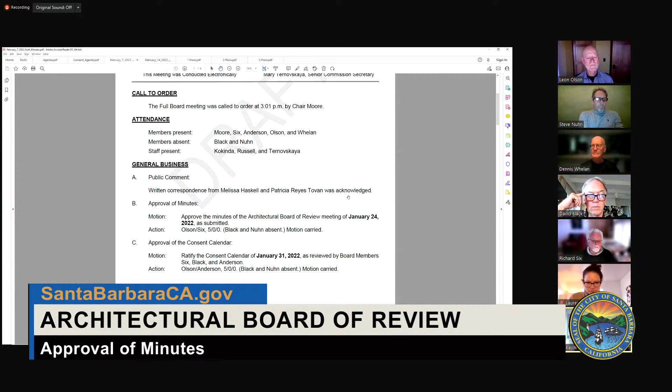We have those up. Apologize, we've got some construction next door, so you might hear some background noise. Move we accept as presented. I'll second that. Okay, any discussion?

No? Okay, let's take a vote. Chair Moore, Yes. Vice Chair Six, Yes. Board Member Anderson, Yes. Board Member Black: I'm going to abstain since I wasn't at the meeting. Board Member Nuhn: I'll also abstain since I wasn't at the meeting. Board Member Olson, Yes. Board Member Whelan, Yes. All right, motion carries. Thank you.

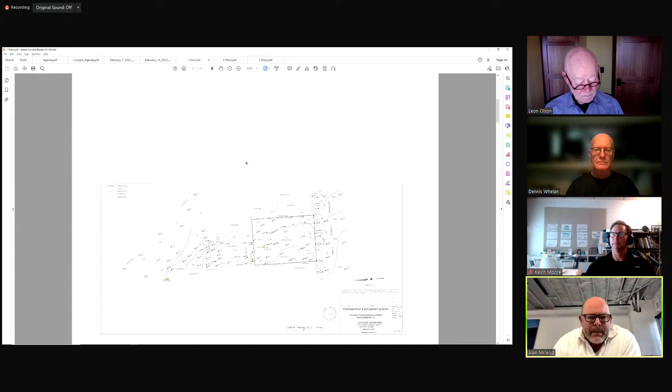If we go to the next sheet please, this is just a current survey of the property. Right now it's an existing open lot. There's a couple of fruit trees on the lot and an existing curb cut.

So our approach to a portion of the neighborhood context is to really look at the material palette that was used within this block and to the east. Can we go to sheet 1.02 next please?

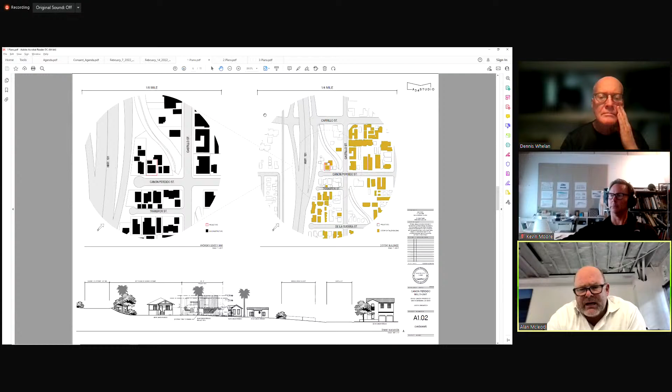We did an analysis on the existing single-story homes in the neighborhood and the existing two-story and apartment buildings in relationship to the context, to look at how these larger structures sit next to the smaller, older structures. If we concentrate on the large map to the right-hand side, we can start to see the two-story analysis where we've got two-story homes located up against a lot of the single stories, especially prominent in the block to the east of where we're located.

If we can go back to sheet 1.00 — a full site analysis of opportunities and constraints diagram from the site. It's a relatively small site with all our setbacks located on it. There's an opportunity for a mountain view from the second story of anything that was proposed. We're taking care of light as it relates to morning sun and afternoon sun penetration into the building, as it relates to our neighbors.

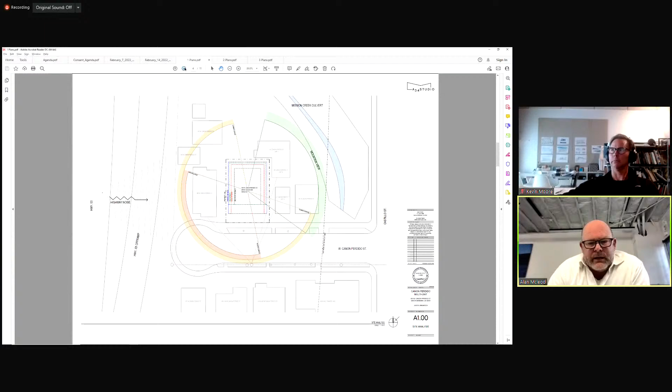A big factor in the direction that was driven was the highway noise factor that we have to contend with also. If we go to the next sheet — as we all know, form follows parking, so we did a large number of studies to look at how we could get the two parking spaces to work the most efficiently on the site.

We've ended up with a single curb cut, two-car garage as a carport that is on the easterly side of the property. Then the two units at the ground floor — the strategy was to use the lower level as a buffer that we come up and over. So from a site strategy, we have our open space requirement to the rear of the property, limiting the parking.

And transversing through the site for the car, so that's as close to the property line as we could be with the garage. Then to accommodate the balance of the open space as a roof deck above. There's a plan, obviously it's not going to be reviewed today, but for an ADU to the rear of the site to make it the 3 units.

For entry, we studied a lot of different options with entry into the building, and it was determined most efficient from a sound and livability standpoint to keep the quiet side of the house to the west and let the eastern portion open up to the view and to the street. So if we go to the next, and the next one.

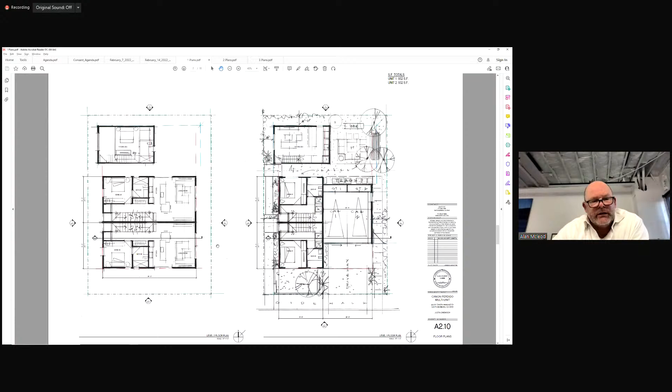On the next sheet, through a skylighted roof access where we handle the photovoltaic array, and then up to a roof deck as a slightly taller element. The idea was to keep the bedroom wings to a minimum plate height and create a little volume on the living side of the house that opens up, helping with the massing of the building to break it up as we address the street elevations and wrap around.

So if we go to the elevations: the palette, taking from the neighborhood, we wanted to do a wood siding, probably a naturalized wood siding, and a plaster wall from the street, which can be seen in the bottom lower elevation.

At this stage, the idea was to carry that wood element as a screen that continues up as a handrail for the roof deck portion, going from solid below to a staggered, open railing system above.

The little section on the left-hand side shows the minimum volumes we're working with: an 8-foot plate for the lower room, 8-foot plate to the upper bedroom, and then a 10-foot plate just to give that living area a little more volume, because these units are fairly small.

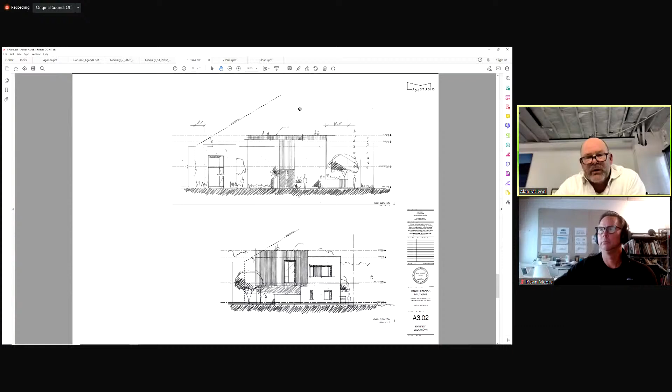I think that's pretty much it. We have the other elevations on the next sheet: the entry elevation and the rear elevation. In the rear elevation, we can see the screening for bikes and trash in that lower level, which is all overhung, and that whole area opens to the outdoor living space. The upper level is just the entry elevation—very quiet, no windows proposed on that elevation.

And I think that concludes our presentation. Happy to answer any questions.

Materials: we discussed just a wood siding at the upper level, off-white plaster for the plaster portion of the volume, and we were looking at doing an exposed block garage base.

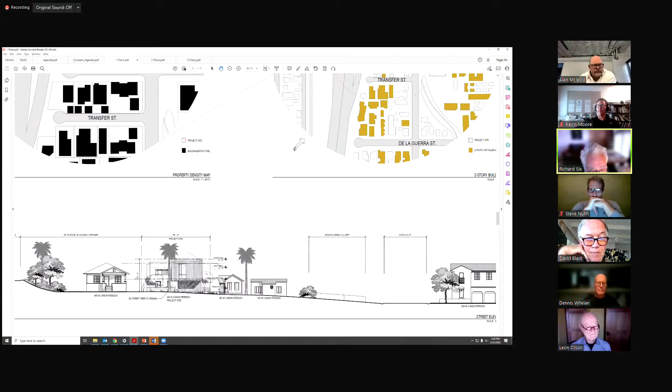Next sheet—well, you can see it here. There seems to be a conflict between the solar ordinance line for the property and... yeah, right there. There seems to be a conflict with solar ordinance limits and the property to the east.

Can you explain that? So the idea—obviously we have two choices. We could go with a cable rail and meet the solar ordinance, or we could do something a little more architectural and integrate it into the screen. So at this stage, we're looking for some direction from you.

I would prefer, obviously, to have the wood siding run up and become transparent to meet the 4-inch requirement. The other option is to create the parapet at the ordinance height and go with a cable rail above, which would be less preferable, I believe.

All right, then just one more minor point—if we go to the site plan, the floor plans, right here, yes. And here, the trash is aligned with the rear of the garage and very present to the open living area, but yet on your elevations of the rear, there is a wall. Can we go to the rear elevation of that?

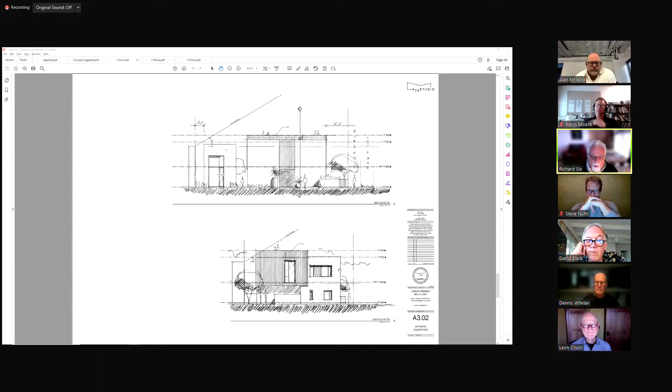Bingo. That lower one seems to be a solid wall. I don't see how the trash is accessed if there's a single depth of trash bins. The idea would be that it would be a screen wall that you can reach over, and the trash could be pulled out from one end on trash day. So that would be stacked.

Okay, those are my questions. Anybody else? Mr. Whelan? Thank you, Chair Moore. First for staff, are we reviewing the ADU, the third building on the site plan? To Board Member Whelan, no. As it's proposed as future, there's no plans set for us to review. So that answer would be no.

All right then. And for the applicant, are there any existing trees to be retained? I believe there's one large avocado and one other fruit tree, and I believe both will be replaced with a couple of new trees to help buffer with the neighbor. So I'm confused - you're removing and replacing them, or they're to be retained? No, they'll be taken down.

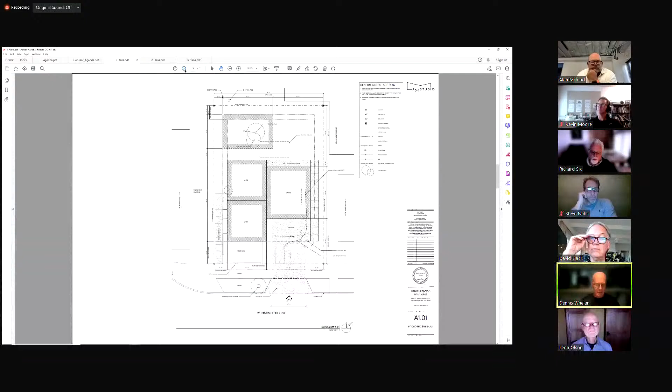Be that as it may. Yeah, a couple of clarifications. If you can go to the plan, Mr. Russell - it doesn't appear there's any interior connection from the garage to the units. Is that correct? That is correct. So all traffic comes from the driveway out onto the public walkway and around to the entries, right? People will walk that direction, yes.

This isn't specifically germane to our charge, but what are the long hallways on the first floor adjacent to the bedrooms? What is the purpose there? They lead down to the bathroom and to the mechanical space and the laundry. Just looks a little inefficient to me, but be that as it may.

For the life of me, I could not figure out how you got from the second floor to the roof deck through that opening, the device that you showed. Where is that? Where does that occur on the second floor plan? It'll occur over the stair. The stair is a double stair - it stacks over the top of each other. As you rise up that stair, they're latched, so they'll open as you come up.

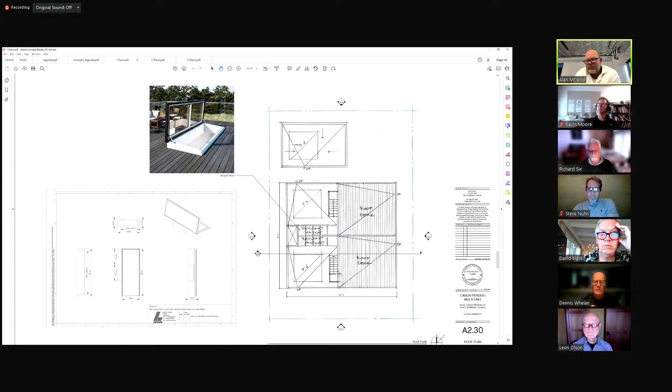Can you go to the roof plan, please, Mr. Russell? It looks like the stairs at the roof deck are perpendicular to the stairs at the first and second floor - there's two sets of stairs. There's a stair that wraps up through the skylight hatch, and then because we've gone with a slightly taller plate over the living area, I need to provide a stair to the roof deck. So that's what the second stair is for.

So you really need that big of a stair to get up onto the roof deck? I thought it was only 2 feet higher. Yeah, which is 4 or 5 risers. By the time we're done. All right, so the skylight hatch flips open, one steps out, and then onto the second stair to get to the roof deck.

Thank you. And if you could go to the elevations, please, Mr. Russell - it appears, not so much on that one, yes, on the lower right, through the use of some shadow, that there's some difference in the plane, the surface between the wood and the plaster. That doesn't occur on the plan - what is going on there? There will be a difference in the material finish just to create that shadow line. Right, it's hard to draw it at 1/8 inch with a pencil.

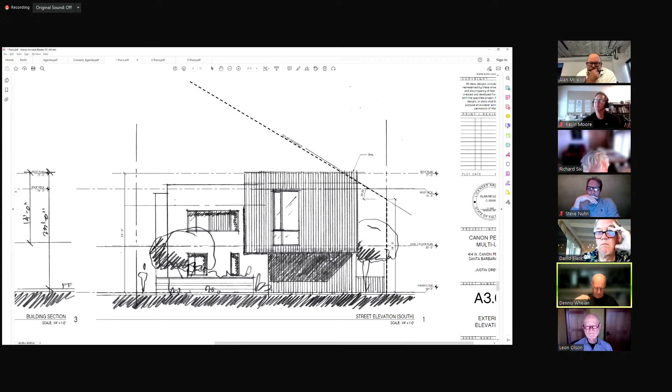Yeah, all right, so let's see - I believe that's all my questions. Thank you, Chair Moore. Okay, Mr. Black, go ahead, quick question.

Could you discuss a little further architectural style wise, how you were inspired by that neighborhood, in particular that little cul-de-sac where everything looks sort of bungalow-esque to me, which is a bit of a departure from the style you're proposing today? It is. So when we initially started, the idea was to maybe create that bungalow style from the street. We studied a couple of different options. Now the real driver was the parking - it wasn't going to work broken up, having the 2 curb cuts, having a lower lift, and the idea was to keep it to 2-story.

Once we started to look at the homes across the street, they are bungalows. The interesting part is that, yes, they're one-story, but they have tall plates and very steep roof pitches. So I started to look at that volume to deal with. If I keep my plate heights lower, I can keep the whole building generally smaller than going two-story with a pitched roof. That was the general driver.

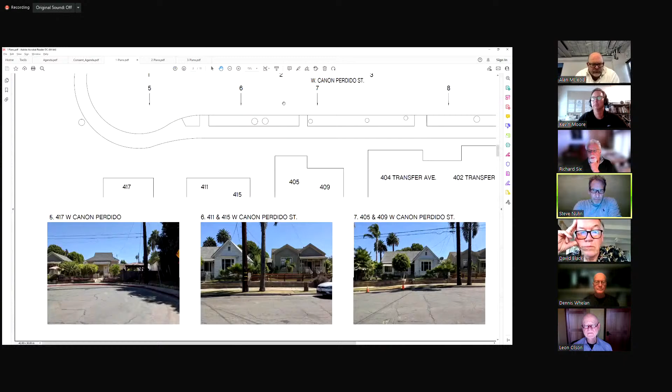Okay, anyone else? Could we go back to the street view photos? I had the same question that Board Member Black had, so I just wanted to look at these again a little closer. Can we enlarge those pictures, please? Yeah, I don't know that I have any questions, I just wanted to look at them. So we can look at these and the ones along the bottom a little bit. That will satisfy me for now.

Okay, anyone else? Questions? Oh, one last question.

On your materials, Mr. McLeod, you list a wire mesh. Where is that used? It was in front. So we're looking at the possibility of doing that as the garage door screens. I see, thank you.

That's all. If that's everybody's questions, we can move on to comments if we're ready. Who would like to start? Well, I'll start, Chair Moore. Okay, go ahead, Mr. Nuhn.

Certainly isn't a hard no or anything. I struggled to find the compatibility. I think it is an attractive building. Maybe if there was some other contextual structures outside of that little street, I don't know. I'd be interested to see what the other board members say, but that's my initial comment right now, just questioning the compatibility.

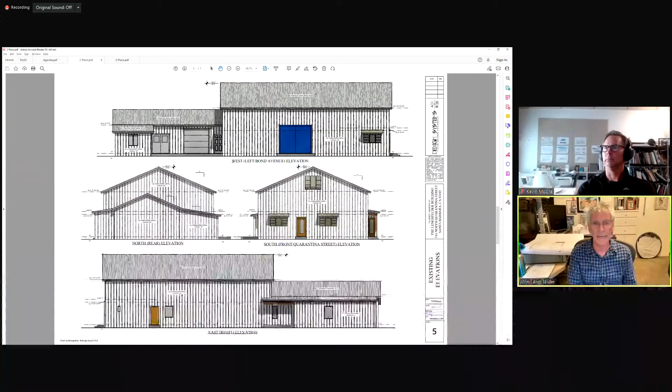If we go back to the first sheet, Will, you can see the two, what I might call towers, one from the rear of the building and another from the front of the building, and then they're connected with a bridge. This preserves the inside space, the original Butler building space, which there is a photo of, which we can look at in a little while. But it's just a nice, clear, open space. This would allow some additional office space or living space, depending on which way I go with this project.

I had originally conceived of it as live work, as Pilar said, but there's a lot of implications going in that direction that may be too problematic. Because I'm looking to the board to give me some aesthetic direction here, you could imagine it either way. It could be live work, it could be just work. But in either case, those additional spaces would be helpful if somebody were using this for some light manufacture or assemblage of a product, where they could have some office space as well as the commercial space.

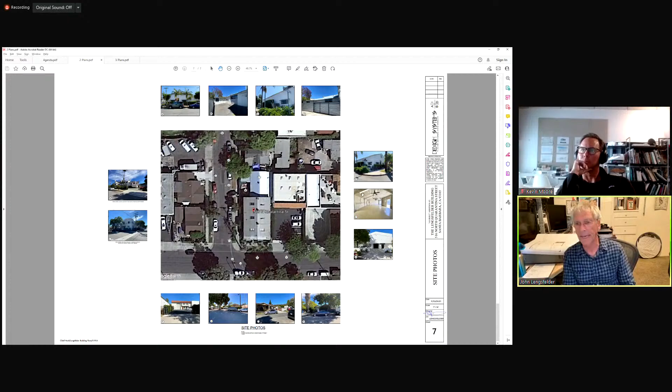If you don't mind, Will, going to the last sheet that has the pictures and the neighborhood - you can see F. I don't know if those can be blown up, but F is the internal space that I'm trying to preserve. It's just a nice open workspace, with two large doors, you get a lot of air and it's lovely. You actually have a view of the mountains.

Bond Street, if people aren't familiar, the property address is on Quarantina. However, this property is on Bond. This property represents the corner of Bond and Quarantina, and Bond is one block in from Cota, right across from the junior high school. So you actually get a little bit of the junior high school view and the mountain view.

And it's a mixed use neighborhood. There's still some residential units, some houses that are on commercial lots but haven't been formally rebuilt as commercial. There's one house that was rebuilt as a house across the street. A lovely couple lived there - the gal's father owned the house for many years and it was not in good condition, so she tore it down and rebuilt it exactly as it had been. There's also Santa Barbara Seafood right across the street, their distribution point. So it's a commercial neighborhood for sure, but there is some residential amongst the commercial buildings.

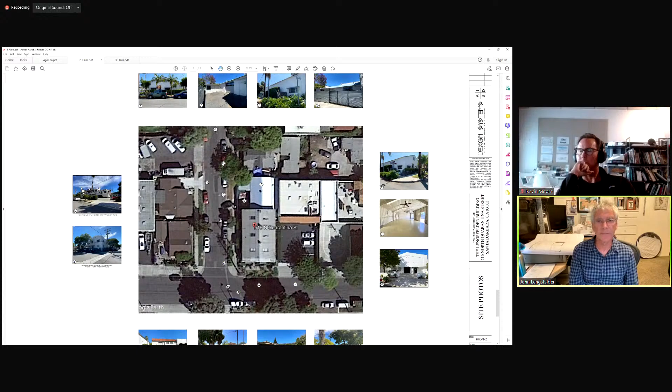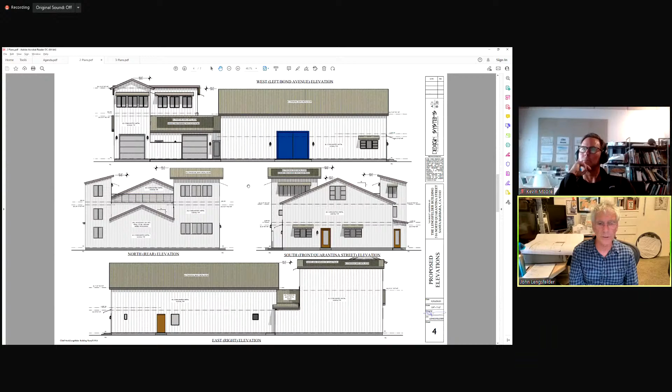I guess if you can go to sheet 5 again, Will. Yeah, so there's the existing elevations. And now if you can go to the new elevations - yeah, there we go. So there's basically what I'm proposing, where you can see where the second story portions are connected with the bridge. And the bridge allows us to connect those two sections without disturbing the integrity of the original Butler building, aesthetically or structurally.

And at this point, I'm happy to answer any questions that the board may have.

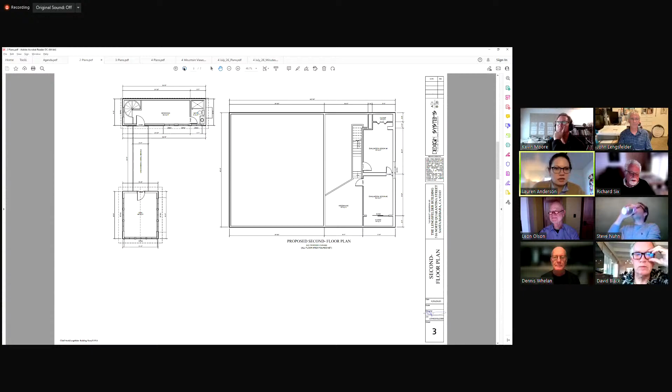Yeah, and looking at the Bond Avenue elevation, there it is. The first tower - did you study the plate height for that den room? Have you studied lowering that, or did you study alternative roofing options?

Have not, and I'm open to it. The plate height was basically, you know, we're slightly high because of the first story to try to make the bridge so that you don't have to step up to the bridge and then step back down. It didn't make sense. It made more sense to just elevate both structures than to have stairs to the bridge. So that was really the determining factor.

As to the roof design on the top, it could go to a shed roof. I thought this looked better, but that would be a way of maybe bringing it down a bit. I'm not sure if that's answering your question.

I guess the question is, I can't really read it here, but what is the plate height on that, just for the den room on that second story? Oh, it's 9 feet. Okay, thanks. Those are my questions.

Okay, I've got a couple of clarifications and questions for you. If we go to the site plan. So the proposed additions are essentially right on, I guess, the more northern property line and the more southerly property line.

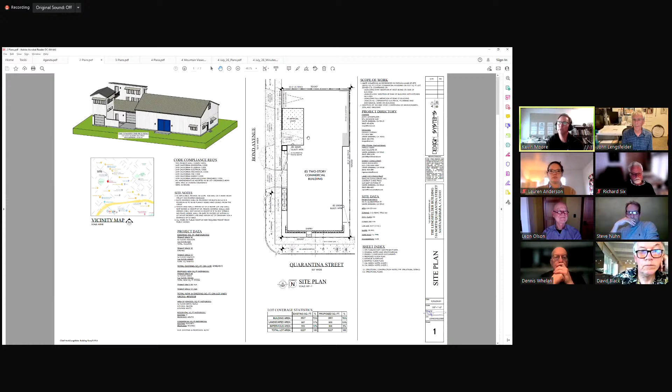If we could go to that aerial photo quickly. I have never been in their backyard, so I would have to - so it looks like there's sort of 2 structures there with a little... No, I'm not sure. We could, Mr. Russell, could we zoom that in? Seeing it's a flag lot, and so that other structure is part of Santa Barbara Seafood. You see the trucks parked there.

I'm talking about the structure just to the right of where the cursor is, the little hand. I guess I can do this, watch, I can annotate. So this structure - ah yes, so those are 2 rather poorly maintained houses. Santa Barbara's infamous landlord has recently bought it in the last few years, and it's unfortunately deteriorated quite a bit. But they were 2 small houses. They still are.

Okay, so you're along this property line, your new construction is right on that property line. You're a few inches off of it. Correct, and the same here. Correct. Now that's a warehouse, and that is a block wall without any windows or anything in it. Understood.

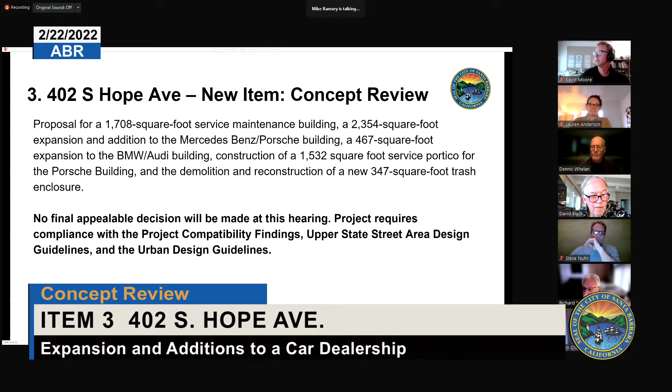Okay, do we have our applicant with us? Yes, this is Mike Ramsey with Lusardi Construction. Just a couple things though - it says the owner is Marie Hauser and SBAG, but it's been this way forever. It's on the plans as SB Automotive LLLP, which is the Santa Barbara Auto Group, same people who own that whole frontage area. But okay, I don't see that in the item description here, so I think we're fine.

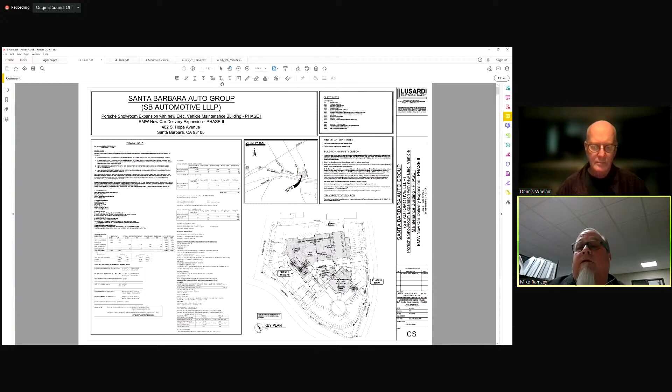Let me go to the next page here. Sorry, I'm not sure how to change the page on this. Mr. Ramsey, we have control on our end, so feel free to just direct. Yeah, just let's go to the site plan then, please.

Yeah, and if you could zoom in on the colored areas there. Perfect.

As you can see, the portico, the areas in yellow are right now covered display areas. Those are going to be turned into portions of the showroom. The purple area is an added part of the service writers areas.

And then the blue is the portico that they talked about, so people pull up their cars to be serviced and drive through into the back, into the Porsche area where it says Porsche service, or into the new electric vehicle maintenance building.

And then over at BMW, there is a roofed portico area for display. They had previously, a couple approvals back, had this as an addition, and they decided not to do it at the time.

So now we're coming back, and it's going to be a display area and a new vehicle area where they take the people who purchase the vehicles and go over all the details of the vehicle delivery area. And if you would like to go to the floor plan next.

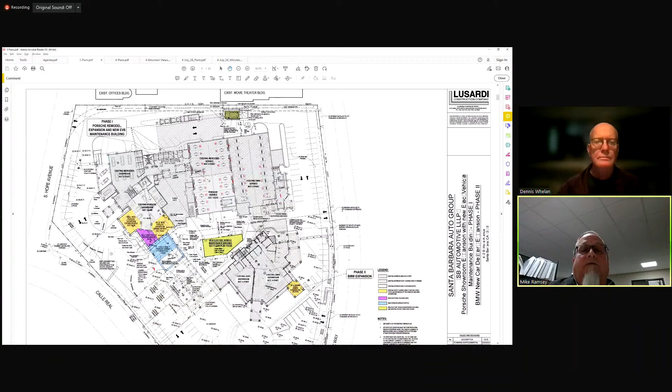We go back to what was on the previous approved plan. It's going to go in this location right over here, just past where the drive is. We can go to the floor plan.

Next one. So you see the areas working in there. There's the reception off in the front, the service writers, and the areas where we're going to be enclosing in the showroom, the drive-through area at the portico. And then down in the lower corner is just the details of enclosing that front area on the BMW.

If we go to the next page. Next page, sorry. This is the battery building that's in that inner courtyard area between the two dealerships.

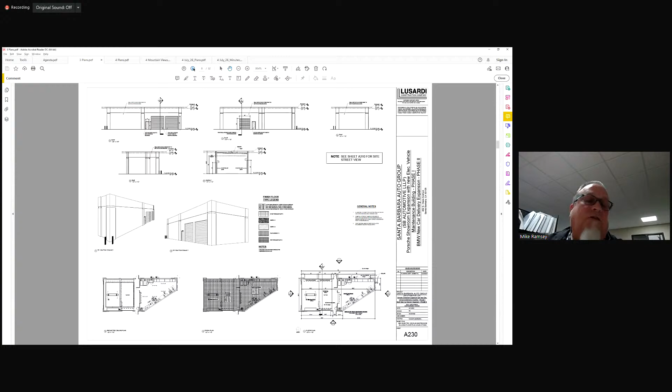In the previous version, the height was an issue. We said that we wanted to bring it down a couple feet. It went from 22 feet to 20 foot 4 inches to the top of the parapet.

In the previous building, the comments were to make the exterior look like it has the same detail as the rest of the buildings, which was adding bands and pronounced columns. Before we had a pyramid shaped detail on the corners, and that went away, and now it's straight and flat like the rest of the building.

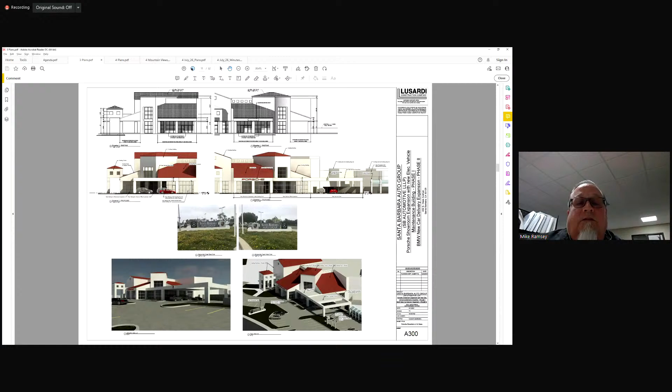If you go to the, switch the page again, sorry. You can go to even another one, please. There's the elevations of the portico on the front of the building for Porsche.

And keeping the roof lines all the same, just extending it out across, a big flat area portico where they pull in. And then if you go to the next page,

is the elevations of the front area in front of BMW, just enclosing that glass area in there. And then the final would be an elevation showing, looking from the street back, a portion of the service building that's in the back.

If you go to the next page, please. You can see in the distance the service building, the electric vehicle service building in the back. Just a better view of it.

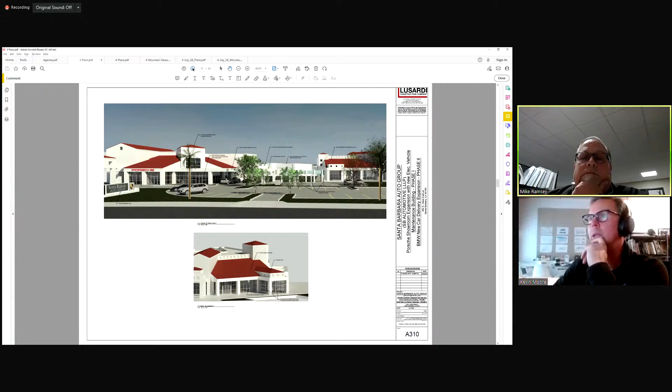Okay, thank you. Mr. Russell, this might be a bit of an ask, but is it possible to get our minutes or motions from all of these separately presented projects in the past, now have them present for this meeting?

I can try and I can update you, but I would proceed with the review without that knowledge, because I believe the case planner is also present today, and maybe they can speak to some of the history on the project, but I do believe it's just considered new. So okay, I will look, but no guarantees.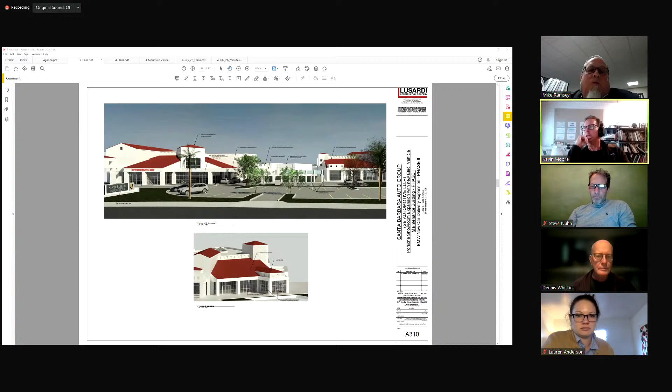Okay, alright. From memory, we didn't have a lot of issues necessarily with all of these pieces and parts, but yeah, it would be good to kind of refresh everybody's minds with that.

So, okay, regardless, if that concludes your presentation, we need to open public comment and ask if there's any member of the public that would like to address the board regarding this project. You can follow the instructions on screen. Do we have anybody out there?

Thank you, Chair Moore and board members. So if any member of the public would like to speak on this item, they can go ahead and raise their hand to indicate that they would like to speak, and I will call on you.

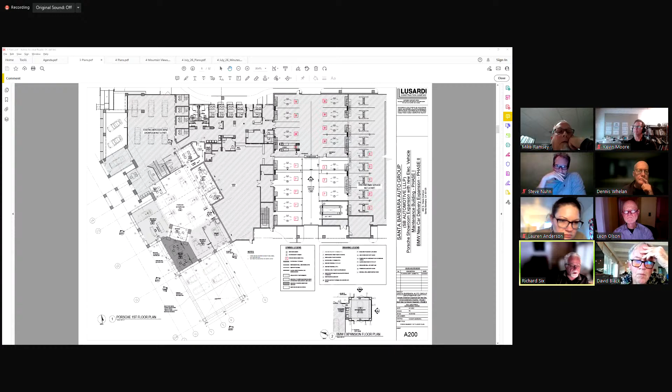So it kind of matches with everything else. I think I remember. Can you zoom out a little bit to capture the rest of the northerly part of this? So we enter - it's very confusing where one enters - but anyway, there's the grand entry, and above column line 14 is the grand entry where there's a standalone porte cochere.

Now there's a covered or enclosed car display to the left of that. Yeah, it's all those areas, the two light gray areas that are adjacent, between grid lines R and Q, and 13 and 14 - those are existing big display areas, and we're just putting glass to enclose those two in, and they become part of the showroom.

I think I'm going north of you. North of me, that's all Mercedes. And if you go to the site plan, you can see it better how it relates to the entry for this project. Okay, let's stay here. There's a main reception and a stairway up above line 14. Correct? Yeah, it's the main entry. You walk - that's underneath the main entry.

So on the left-hand side of this main entry, has that been enclosed already? On the left-hand side, no, that is new - that's new showroom right there. Okay, so my question is, the glass line on the right-hand side of this main entry is recessed in back of the columns, and on the left-hand side it appears to be flush with the outside.

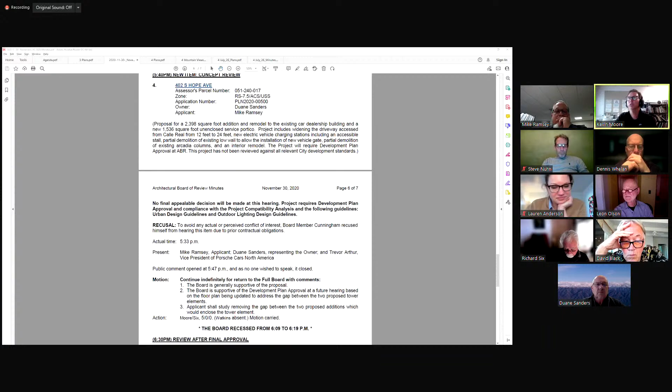Sorry, let me continue, please. So this was the project that includes widening the driveway, new electrical vehicle charging stations, partial demolition of the existing wall, partial demolition of arcadia columns, and interior remodel. Okay.

But there's no mention of the car charging structure in this one. Okay. So there's that. If I may, the second part of this about the service building was May of '21. That might help you find those other minutes. Right, that's very helpful. Thank you.

Mr. Russell, would it be helpful to take a break? I think that would help. You found it? I believe it's right. Yes, got them right here. I think there's even another one as well. So I can pull these up.

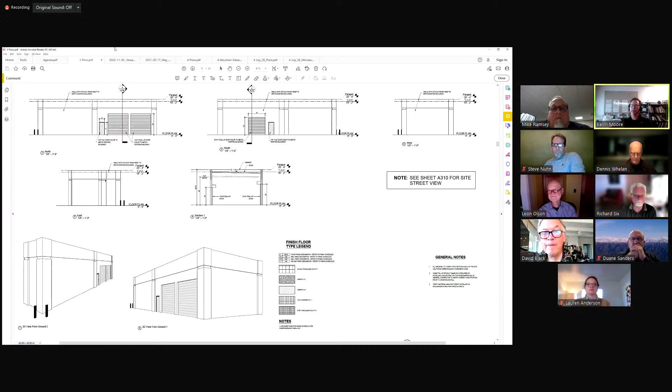Through the trees. Okay, let me go to a quick look at the photo of the exterior of the existing building, so we can just verify the detailing. Keep going.

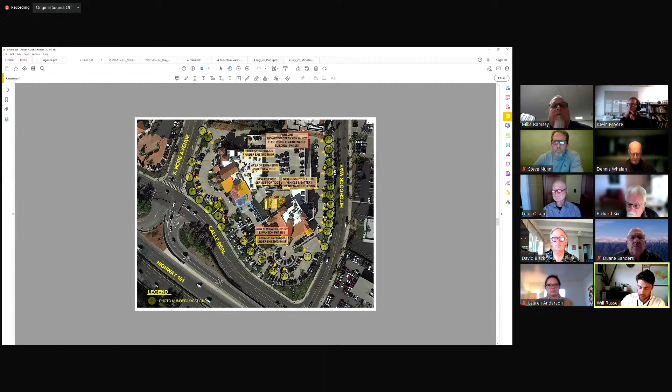Just any photo of the exterior would be helpful. And Mr. Chair, we're looking through this as well. I believe the two minutes that I pulled up are the most relevant to the project. I don't believe I could find any more, so I think what we have now is what we have.

The BMW portion of it was, I think, probably back in 2018, the BMW Mercedes extension portion. We do have those minutes present as well, if you would also like to review those, Mr. Chair.

Okay, but let's get through this first. So we've got our photo there. If we could just jump back now to the elevations.

Does any board member have a specific question about this portion of the project? Vice Chair: Yeah, can the applicant fur out...

It's obvious between the real photos and this edition and this proposal that the real photos show a definite post and beam condition. I think the intent was that where this horizontal reveal line is, the portion above would be flush out with the column faces, so it truly expresses itself as a post and a beam with an inset panel. Is that doable by the applicant?

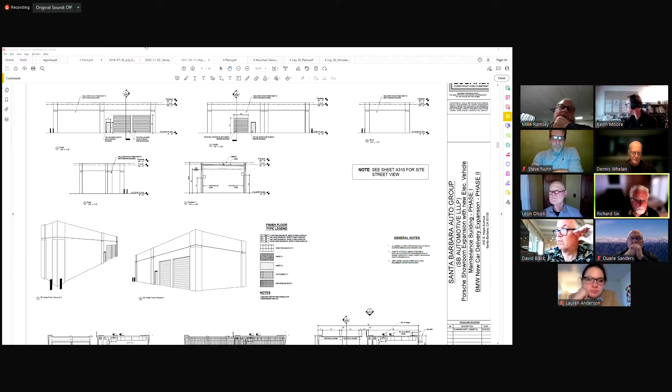I'm complete with this one. Okay, anyone else? No? No. Okay, let's move on then to what's next on the list. And what do we have minutes for, I guess? So help remind me, Chair Moore, we've gone through—

So that's the 2020 minutes. Yes, I believe so. And this one talked about — I believe these are the 2021 minutes for the electrical vehicle maintenance building. Right, we just covered that. And then we also have the 2018 minutes, I believe.

This is for just a general exterior remodel. Yeah, and that one did include the glass enclosing of that one roofed portico area in the front. But if you want to go to it and look at it, we can talk about it. Okay.

And this particular scope is part of the overall proposal now — just only the portion of the BMW. We ended up not adding a bunch of square footage to the Audi and BMW building, spending the money, it was at that time, and so it didn't come up. And now the latest one was just enclosing that one area, just going back and enclosing that area.

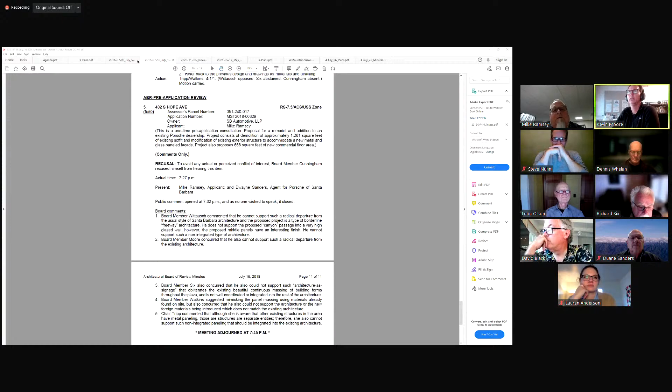And this is 2018, and this is the enclosure of that corner. Yes. Okay, okay, well let's look at that then, if that's part of this application now.

Yeah, they wanted us to put everything as one on this application — all the square footage, the asking for the square footage allotment, and also everything be all in one submittal. Right, okay. Well let's look at that on the drawings now. Okay, you can direct us to that. Go back to the floor plan.

And right there in the lower corner — oh, back one, go back. Where that is, it's on the BMW building, in the lower corner in the front of the building. The columns, the glass, and everything are existing, maybe the columns and the roof and everything are existing.

We're just filling in the front glass and the two sides with doors so they can still move their display cars through, because there's a post-tension deck up there where they display all their vehicles. So the reason for the two doors is so they can still bring vehicles all the way straight through for the display area. If you go back to the site plan, we'll show you that area. And this is specific to the dark gray — yeah, it's right there, yeah, if you zoom in right there, yes.

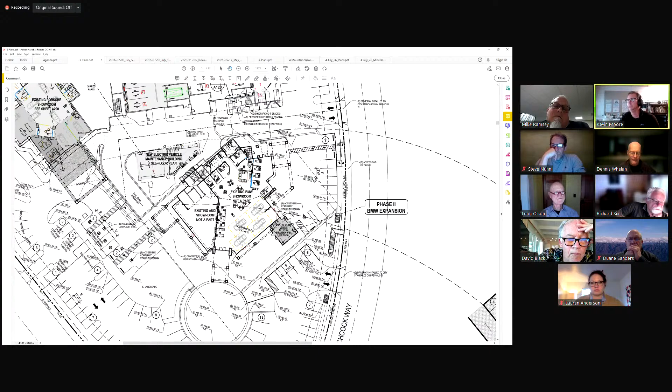Okay, let's look at the elevations of that. That's this one right here, the lower one. You see there's existing and proposed for each elevation, and then there was an elevation above this. It's the front, so you see the existing, which looks back to the existing glass line, and that's the new glass line.

Any questions regarding this piece? Now, this is that remote little extension on the ocean side of the building, correct? Oceanside, Hitchcock side. Yes. Anyone else's questions?

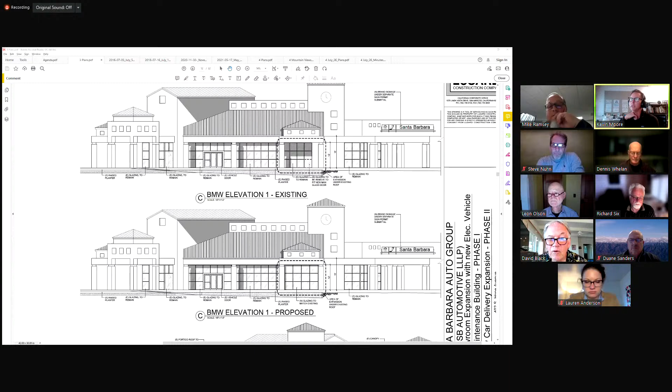If we scroll down to the bottom elevation there, is there a reason the folding door isn't centered? Did you just bias that based on the mullion breakup? No, it's how it sets up on the inside with what's going on when the car's in there and then giving it out.

Mr. Chair, I'd rather have it very obviously off-center than a near miss. In my opinion it's a small thing relative to the scale of the building. Ideally it would be either centered or on that typical mullion line. The existing one is a little off too, and it just has to do with how things line up on the inside—there's a bunch of different ways to skin a cat, I guess.

I'm interested in other comments about this piece of the project. Any other board members with comments? Mr. Olson, go ahead.

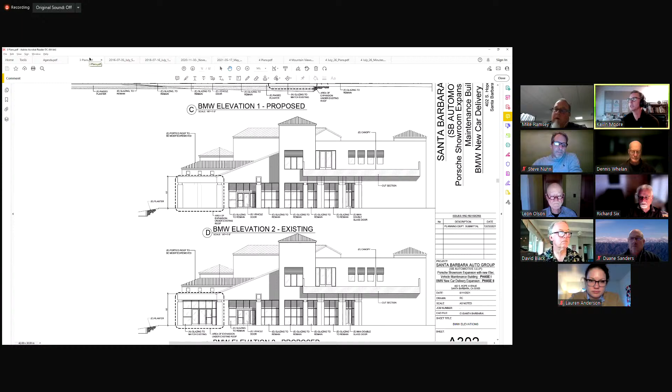Moving on, if we could go back to the overall site plan, what is next? We've covered the electrical vehicle maintenance building, BMW expansion, the Porsche service portico, and the Porsche addition—the purple one.

I guess it's a relocation of the trash enclosure. It was right where that electric vehicle building was set, and we moved it to that location. It looks exactly the same, just a little bit taller so it makes sure it covers the bin that's inside it.

Okay, let's go to that sheet. If we can zoom in on the elevations, please. So it's plaster with a small cap on top—looks identical to what the other one looked like, except it's 8 foot instead of, I think before the wall was at 7.6, and we just made it 8 so that it definitely covers the bin that's inside it.

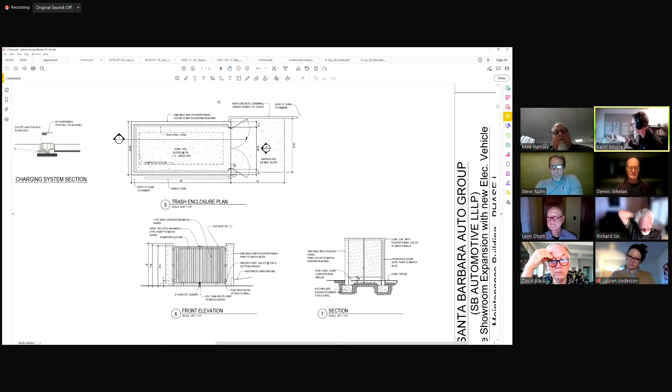Was it landscaped or paving? It's some landscaping, some paving. So existing landscaping will remain essentially around it—there's no plan to do anything else. Does anyone have any other comments on that? No, looks good.

Okay, what is next? Is there anything else at the Porsche additions that we didn't cover? No, I think that's everything there.

Is there a landscape plan included? There will be a landscape plan just for the planter areas where we have to redo some areas, right up in the very front. We don't have that yet, and it's also going to be requested from our earlier design review meeting. That'll be Arcadia Studios - they're just going to fill in what's missing or what needs to be taken care of. And if I might add, in 2018 when we did the expansion on the Mercedes showroom, we redid the landscaping on this entire piece of property from Hope Avenue down Calle Real, wrapping all the way around to Hitchcock. Arcadia did all that, so those plans are on file if you need them.

Okay, thank you. All right, so if we could go back to the project description just to make sure we hit everything, please. We're on the agenda description: expansion to the BMW building, Mercedes building, trash enclosure. Great, okay, are there any follow-ups?

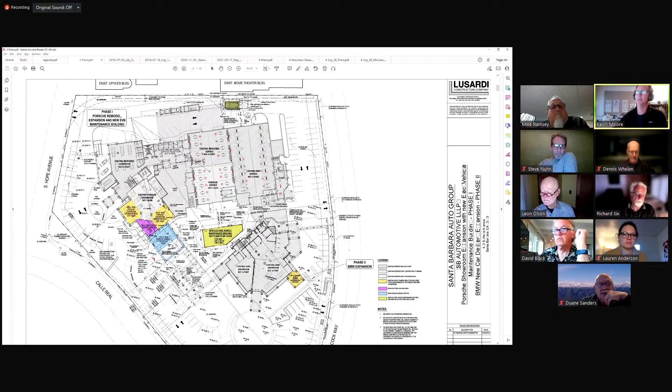The purple area - what's that called? Can we zoom in there? It's the showroom. Showroom, yeah, an entry. If we could zoom in on that area. Right, that's part of the service area.

I'm sorry, service riders - to make the Porsche... I think I've said it. Yeah, so you're essentially saying put columns here and remove this? Yes. And if they need more breathing room, reduce the landscaping where that new plaster column is proposed, back to the original existing curve or more.

Okay, or maybe the general comment is to reconfigure the mouth of the queuing area and the right-hand turn lane. So could we tighten that up to say: study the new Porsche service portico to reduce the extent of the span? Yeah, that way it leaves it a little open for them. Okay.

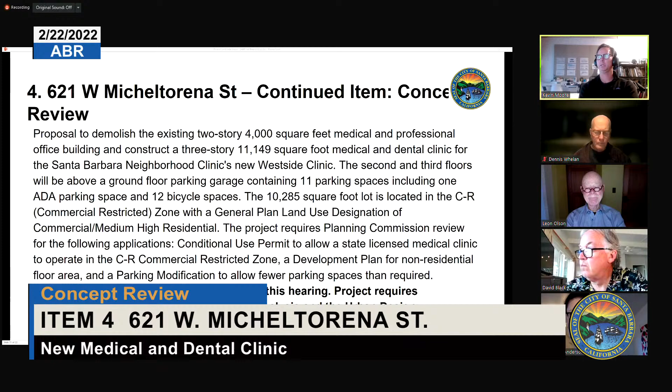Second and third floors will be above a ground floor parking garage containing 11 parking spaces, including 1 ADA space, and 12 bike spaces. The 10,285 square foot lot is located in the CR zone with a general land use designation of commercial, medium, high residential. Project requires Planning Commission review for the following applications: the conditional use permit, a development plan for non-residential floor area, and a parking modification to allow fewer parking spaces than required.

No final appealable decision will be made at this hearing. Project requires compliance with the project compatibility analysis and the urban design guidelines. We last saw this July of 2021.

Okay, do we have anything from planning staff or our last motion that we can look at?

Mr. Chair, while we were doing that, I would like to reach out to the applicant, Ms. Allen, and ask, can you let me know who else would be a part of the presentation team today, or the applicant team?

Absolutely, thanks Mr. Russell. Well, myself, I have a very brief comment, and Brian Cearnal will be presenting the architecture, and Courtney Miller will be presenting the landscape.

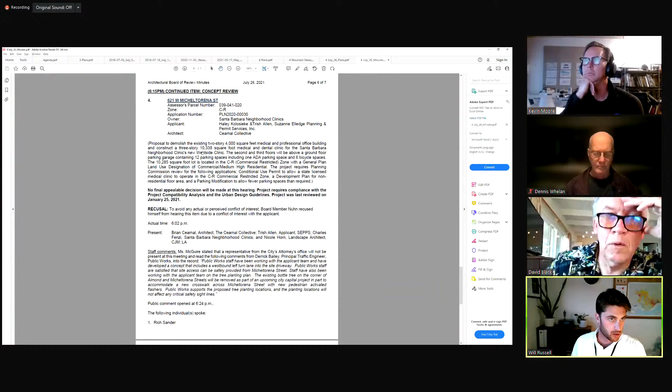Okay, thank you. And then these are the minutes, Mr. Chair, from last time this item was reviewed. I believe it was July 26, 2021.

Okay, continue indefinitely with comments. For the project as presented, it's difficult to make the project compatibility findings due to the existing neighborhood fabric. However, the overall height has been minimized to the greatest extent possible. Therefore, the project height is appropriate for the site. Massing needs continued study to further reduce the impact of the project on adjoining properties.

The proposed exterior styling needs to be restudied to be more compatible with the surrounding neighborhood and the City of Santa Barbara urban design guidelines. Number 3, the transformer location shall be restudied and relocated to Almond Street and be screened. Number 4, there'll be a dedicated left turn lane going west on Micheltorena Street, and the parking flow with entry on Micheltorena Street and exiting on Almond Street is appropriate. It appears to be as efficient as possible.

And then generally, we made the compatibility analysis findings, with the exception of, I guess we did not really make the compatibility analysis findings as a whole. Okay.

Looks like we have Ms. Broderson with us as well. Do you have anything to add before we jump in? Yes, good evening, ABR members.

This is Kelly Broderson with Community Development, and I just wanted to say that the project has been designated as a community benefit project by City Council on March 3rd, 2020. And the ABR has seen this project 3 times for conceptual review. As you said, the last time was on July 26th.

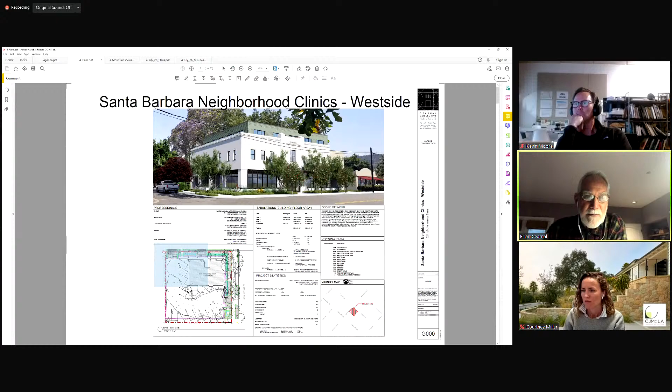Thank you, Trish. And with that, you guys have had plenty of time now to look at the building, and you're probably ready to get into comments, but let me give you a little bit more input. If we could zoom in, Mr. Russell, into the lower left there, the existing site plan, just to look at it, it's worth referring. By the way, I realized that gray overlay is our existing pavement and transformer location. That's a little mistake, but at least it helps you align and realize that our first floor plan is pretty much this exact footprint. We just go over the top of it with buildings.

So let's go to sheet number 2, to the photos. I think it's good to have a quick recap of where we are. Mr. Russell, maybe you could start with number 1 and blow that up, and we'll move across quick. You guys ask about mountain views, and this really is the only point that you see the mountains from San Andres, and you can see in the background the sort of hip roof, which is the roof of the existing building. So in terms of where the line of our building would be, where the hand is right there, we aren't going to block any mountain views.

Let's continue on to number 2. You can see here there isn't any mountain view. Unfortunately, that tree in the foreground, and the tree in front of our site, is being removed because of those improvements. Go on over to number 3. This gives you a good sense that this is pretty much a 2-story building in the location of our building for the most part.

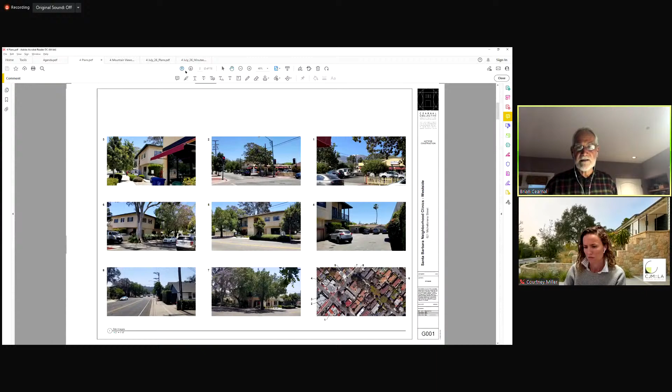Now we can go to the next sheet, which is the first floor plan, site plan. I think you're all familiar with this, and as I said, it pretty much mirrors what's there on the site today. The good news is those street improvements are going in. We have a 10-foot setback minimum. We have planters that are helping us meet our SWMP standard, and we did move the transformer onto Allman as the board requested from our last review.

Next page. Second floor plan pretty much mirrors the first floor. We are set back off of our neighbor to the south. There's a little deck area over there for employees, and then there's a strip of planting at that second floor to help soften that side.

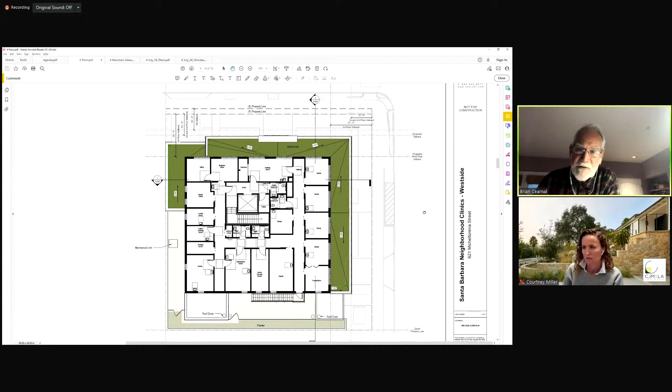Next sheet, third floor. The third floor, for massing purposes and neighborhood compatibility, is stepped in. Since you last saw this, we've been able to lower this parapet a little bit, but have a green roof there. Since this is the dental clinic, this is going to be a great little feature for these dental rooms to open out with large windows onto this green roof. Next page, please.

Next sheet takes us to the elevations. I'm not going to belabor these because they're elevations and never look as good as the views, but this is the basic massing, as you can see. And I want to point out that those mechanical units do appear to peek up over the mechanical screen. I'm going to show you some views to illustrate that we do not believe those mechanical units are going to be visible from anywhere except an airplane.

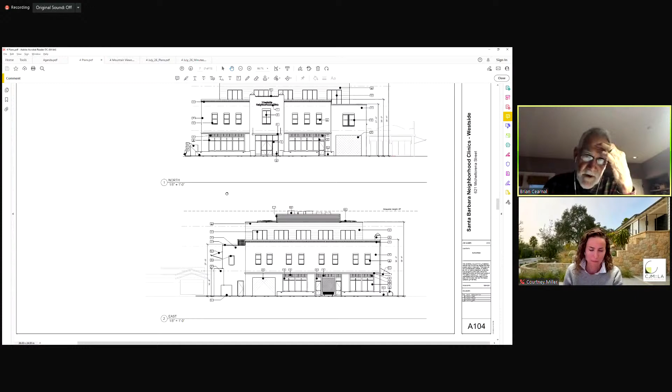But from our last review, we basically have simplified this building and given it traditional proportions. There was a suggestion to create sort of a vertical element for that entry, which I think is successful. We have a very simple but appropriate banding both at the top and at the second line of the second floor.

And we've just greatly simplified it. The third floor element, we decided to clad in a material that we think will be appropriate and compatible to this neighborhood. Basically, we're using a similar horizontal siding that we used at Cancer Center, and then the screening at the roof will be some kind of a metal screen that will recede in terms of color. So I'm obviously looking at the Micheltorena elevation there, the north elevation above, and then below is the Allman elevation. Let's go to the next sheet.

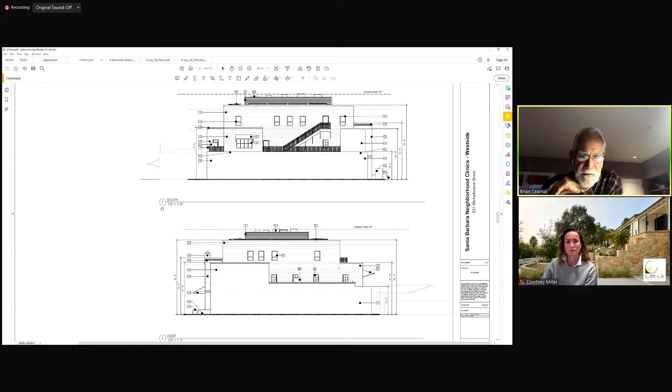Then the south elevation is next to our neighbor on Almond. So you can see that lowered parapet, which is going to have planting that will cascade over it, and Courtney can touch on what that planting is. But again, just using that very simple horizontal green siding. And then the view finally from the west, which I have some shots of as well. That would be the San Andres side next to the hardware store. Next sheet, please.

as Trish was making her introductory comments. The new trees, Courtney will talk about, but they're basically firewheel and olive there along Micheltorena, and then we have some purple leaf plum that is along Almond. There's kind of grill work above the windows because that's interstitial sort of plenum space that has to be detailed, but the proportion of the openings is what really is important to us, and I'm sure that we'll study that more. It's hard to see.

We have a little header detail to try to create the right proportion with those windows on the second floor. And we did lower from what you saw last, we lowered that main parapet element. But obviously the style is something that we think is compatible with our community and with this neighborhood. Next shot, please, next page.

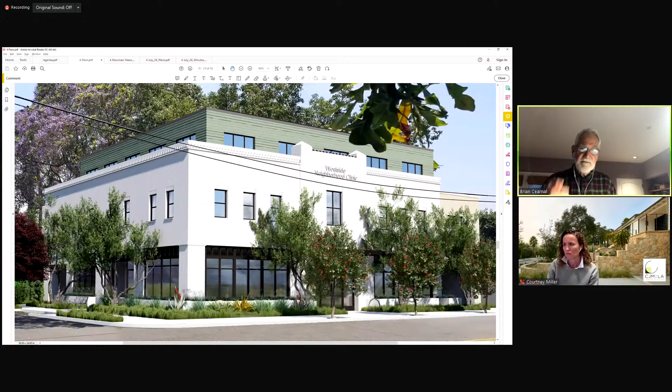So this is looking from San Andres. Unfortunately, that big tree that is going to be taken out, we took out with Photoshop so that we were honest about what this view was. So we can see how the third floor element steps back. To be honest with you, I'd love to see a little mural on this wall, but we can talk more about that later. Next slide.

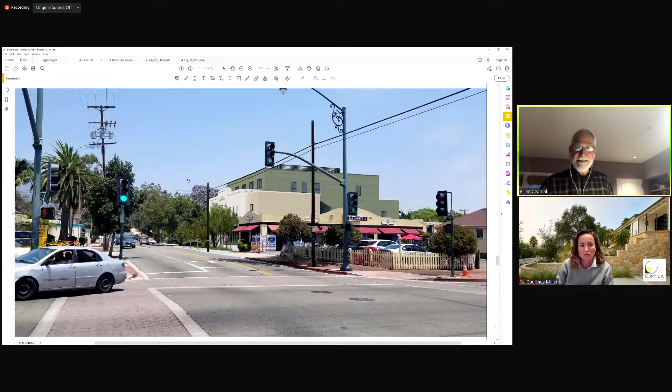So the view coming down Micheltorena towards San Andres and the massing of the building and the actual tree planting that's going to be there. Next page, please.

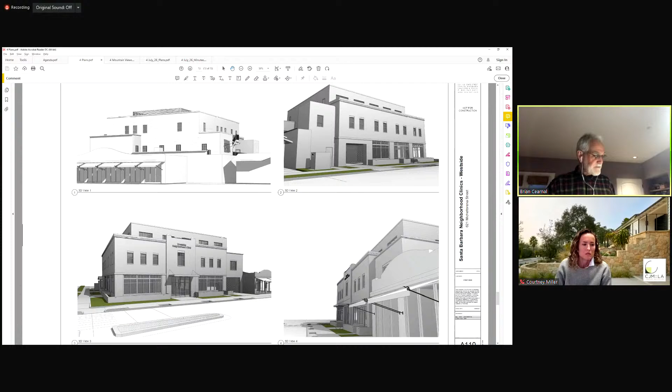I'm guessing she'll want to go to the last sheet right off, which is the landscape plan, and then we will conclude our presentation. Actually, no, we can stay here. Yeah, this sheet. Right. So, actually, could you go back to the tree disposition plan, the prior sheet?

I just wanted to touch on, there's 3 existing street trees along Micheltorena that will be removed. That's part of the street widening. Currently they're within the parkway, and with the new design you'll see on the following pages that they're within the street with the new road widening.

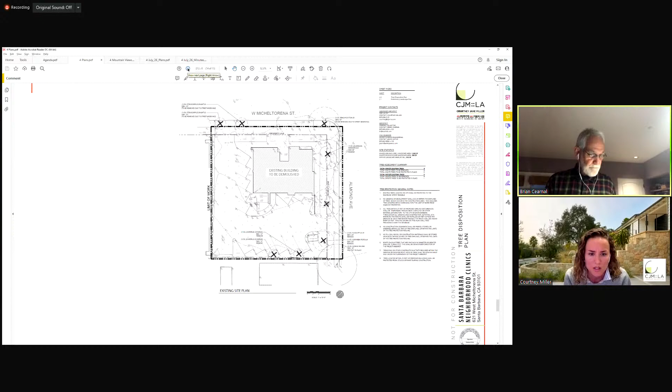There's a new crosswalk being installed on the corner there as well. The Jacaranda and the eucalyptus, actually 2 eucalyptus trees along Almond, will be removed as well, mostly due to the need for making that sidewalk straight again, and again corresponding with the pedestrian master plan.

All of those removals were approved at the Street Tree Advisory Committee in December, and then following that, the Parks and Rec Commission, so we have the support for those removals.

Replacement species are per the urban forest superintendent. On Almond, there was a comment from Parks and Rec that they're looking for something with a larger canopy, so you'll see we have the purple leaf plum indicated for the parkway tree along Almond, that's that purple symbol. Those are pretty small, and a lot of the street trees designated haven't been revisited in decades, so we may take a look at that and propose something else in coordination with Nathan Slack.

Otherwise for the plant palette, we're trying to keep it very simple and textural. I love the green color in the building, so we're trying to play with that in the landscape. We have olive trees proposed for both the Micheltorena and Almond Avenue elevations, and those will do a really nice job of playing with the color palette on the building and having a nice dappled canopy that will address shading in the street and also form a nice canopy in relationship to the building.

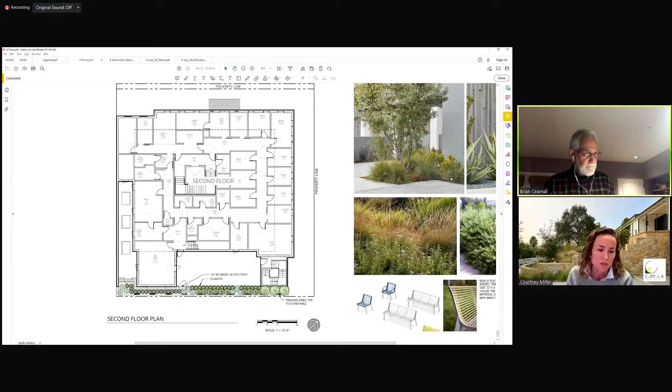Courtney, if you could touch base on the second floor planter also along that south side. If you want to scroll down, we have the second floor shown. We have a planter along the south side there, lots of different layers going on in that planter. We have a couple of vine species proposed, both of which are self-clinging, so those can grow down and cover the wall really nicely. I think we have an image of one of those just to the right, the upper right image in the planting.

Otherwise, we do have green roof panels proposed. As Brian mentioned, we included a detail for that, a comment again from our DART process. We're looking at using the LiveRoof product, which we've used on a number of projects around town. It's a pre-grown module that just sets in place with a 4-inch soil profile that can support things like sedums, grasses, and succulents.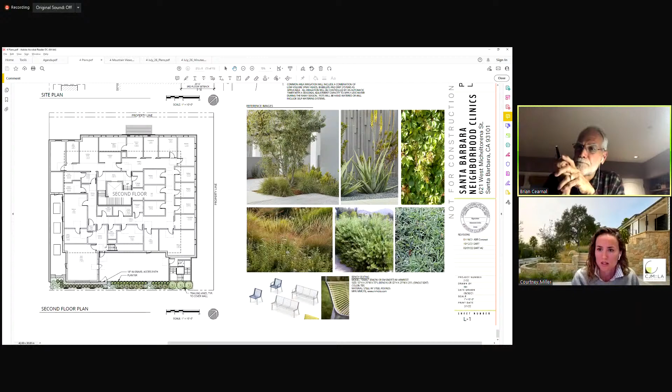I think that's it, unless Brian has anything else. Nope, I think that's it, that I missed. Thank you. Happy to answer any questions.

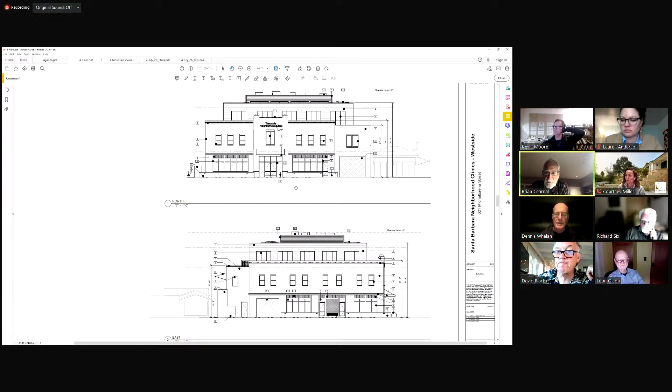Mr. Whelan. One small question, Mr. Cearnal. What is the material of construction on the first floor, specifically on the two walls that lie on the lot line? Plaster. It's a framed plaster wall, not concrete, nor... well, CMU. No, the walls on the property line will be CMU with plaster. Yeah, CMU with plaster. Thank you. That's the only question I had.

Okay, Mr. Olson. Yes, as to the third floor and Ms. Lodge's comments, I was also a little bit wondering why you chose, maybe you could tell us a bit about why you chose horizontal siding and painted it green?

Well, the image for me is that the two-story building has a feel that it's been there for a long time, and the third floor, at least conceptually, was built at a later point. It's very hard to make this third floor plaster and not have it be more massive. To make it Spanish Colonial Revival makes it more massive. To me this simple, warm material, which I think was used very successfully at the Cancer Center, is just a comfortable material that allows for larger openings, which is ideal for that dental facility on the third floor. It kind of tells this theoretical story that these are different times, that these are different buildings. That's the feeling, and I think it helps. The horizontal helps keep the scale of it a little lower, and I think the color tends to make it recede as well. So that's what the thinking was. Thank you.

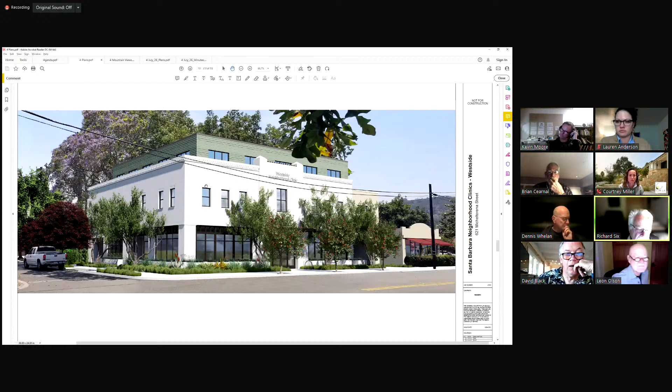Okay, thanks. I noticed on the sections that these windows were not fully recessed to the back faces of the surface of the interior walls, especially at the third floor. Is that your intention, or are you flushing them out with the exterior surface? Well, obviously on the first and second floor it's critical that we get deep recessed windows with the plaster detailing. At the third floor, I think it just could be the way that it ended up being drawn - I haven't thought a lot about that.

Certainly there's nothing that would prevent us from recessing those windows back in the wall. Okay. And then, well, let's just discuss it in questions. Can we go to - probably the best would be the rendering at the San Andreas.

Yeah, there you go. Did you consider - well first of all, just a comment, I like the idea of the mass over the garage entry being very complementary in color and warmth and plaster to the existing shopping center. But that little - did you study taking that same color and material and using it for that little second floor outrigger at the employee break room?

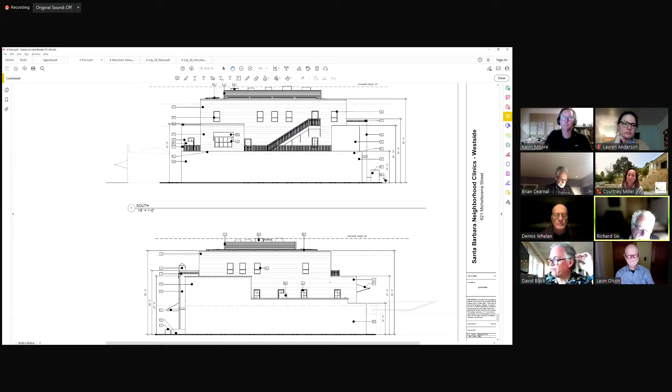All right, my last question is to Courtney, about the choice of trees around the frontages. It's my understanding that olive trees are very slow growing and don't become considerable masses to soften the elevations of the building very well until years and years and years. Can you explain your selection of that tree type? And if I'm incorrect on the variety of olive, please correct me.

Thanks for that question. I think we use the fruitless variety of olives, and we use them quite often for everything from street trees to parking lot trees. They have a beautiful canopy. In terms of growth rate, it'd be similar to most of the other canopy type trees, with the exception of maybe a sycamore. Those are the fastest growing trees, but they're medium water use, so we can't use those for something like this.

But if you're looking at how they address the mass of the building, I would point you to Olive Street, particularly the blocks around Canon Perdido. The olive trees there are just really striking. They're huge and they grow up and out. We've had this comment before, but we love these trees, the color is beautiful, the canopy is not overly dense, and they don't take a lot of maintenance. So that's why we chose it.

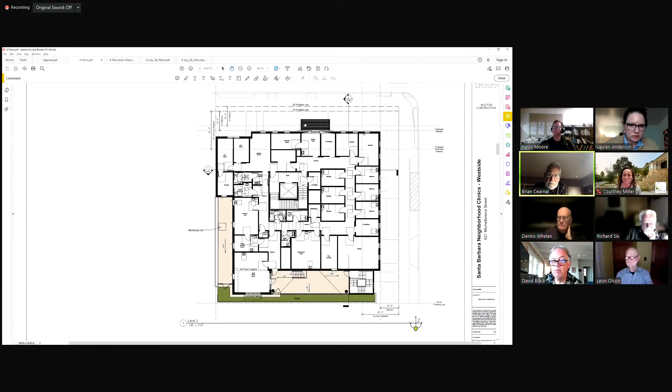And then one other question along that same elevation, or same second and third story on that same elevation. Is there any opportunity to study programmatically a way to break up the second and third story? I know Mr. Six mentioned changing the material in part of it. Is there also an opportunity programmatically to break it up? Or is it pretty much set? I'm not sure.

I've just been sketching here Mr. Six's idea of doing the plaster element for what is the employee lounge, which, as we can see on this elevation on the south side, it sort of mimics the stair tower along the Almond Street side. I think that's a really good suggestion. I think actually having that plaster be proud and overlap that third floor, similar to what it does on the left side along Micheltorena, would do a lot of work.

As far as the third floor, this building is already structurally complicated enough just by stepping the third floor back. I really think that third floor should just be as simple as it can possibly be. Okay, those are my questions.

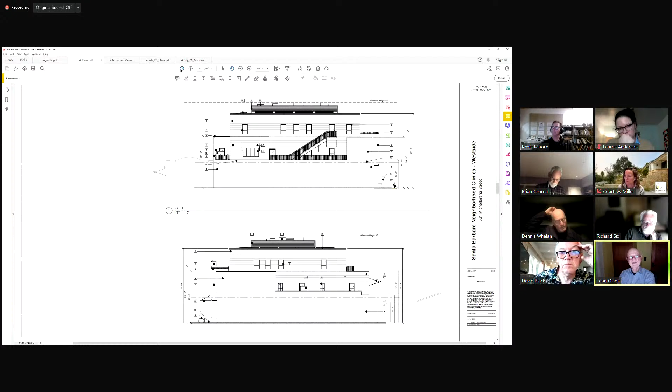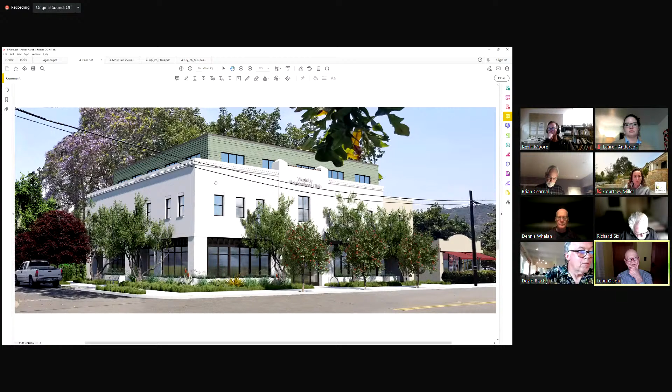So after looking at this for a while and thinking more about what you had said about your reasoning for using that, I come completely around to think this is quite successful. I do believe that's a good solution to that top story. As we move around the building, and we've been talking about that with the last couple of comments here, that's where I begin to wonder whether or not there isn't some way to introduce another siding, and I think you have mentioned that, so I'd support that as we move around the building.

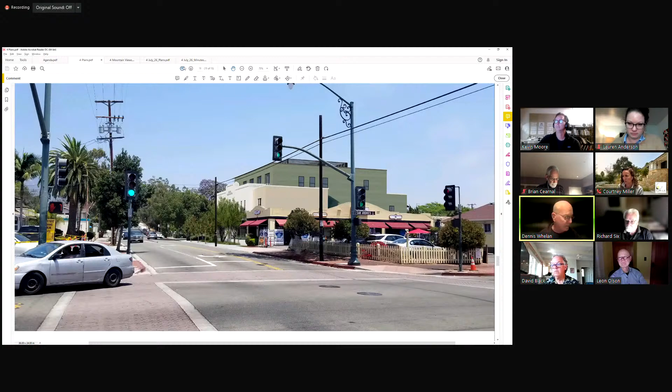The transformer did move, but now it's less than 10 feet from that humble building next door. I have reservations about that.

The mechanical screen on top of the third floor - that view shows it's going to disappear, which answers my question. It doesn't look too attractive in the strict elevations, but if it disappears, I suppose there's nothing more to be said about that.

I think the garage opening could use a little more articulation, such as a recess or framing. It seems rather stark. I like the general approach Mr. Cearnal has taken with the first and second stories of it, very humble.

Mr. Olson, I believe it was mentioned that the entry facade could use a little more pronouncement, but these are just small adjustments to a design that is well underway and that I can support. Thank you.

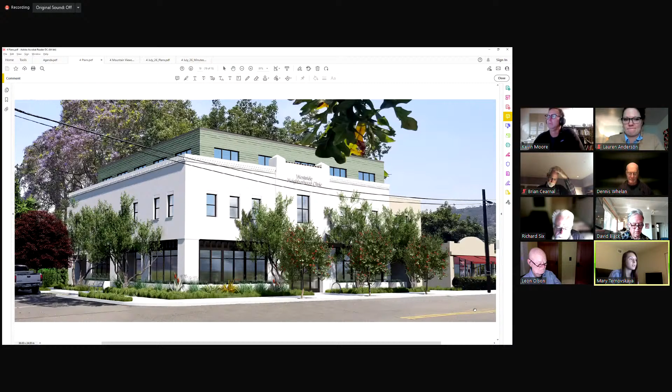Yes. All right, number four: one board member is concerned with the mass at the property line on the west elevation above the Micheltorena garage opening; provide shadow lines or articulation of the wall plane, and give consideration to some detailing or articulation of the first floor wall massing along the south elevation as it relates to the neighbor to the south. Those two should be separated by an 'and.'

Also consider articulation or whatever on the south wall. Okay, yes. So number five: some board members would like to see slightly more detailing at the front entry facade and at the Micheltorena garage opening.

And number six, the board preliminarily made comments regarding the project compatibility analysis. All right, I think that's it. Approval from the second. Okay, thank you, let's take our vote. All right, so I'll go ahead and start with Chair Moore, yes.

Vice Chair Six, yes. Board Member Anderson, yes. Board Member Black, yes. Board Member Olson, yes. And Board Member Whelan, yes. All right, so the motion carries. Thank you.